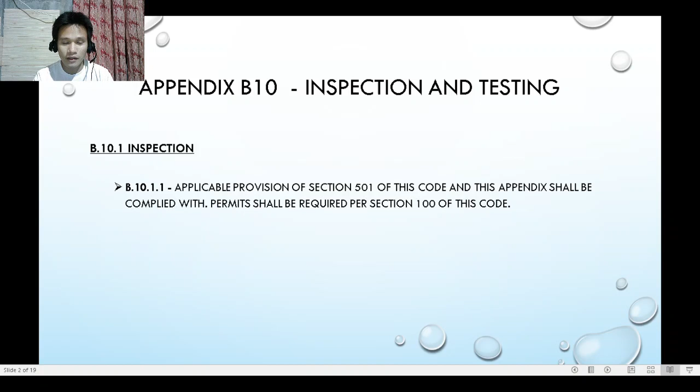So, B10.1, Inspection. Applicable provisions of Section 501 of this code and this appendix shall be complied with. Permits shall be required per Section 100 of this code. So, Section 100 is the permit required. So, to ensure compliance of the provisions of this code, the professional services of a registered and licensed master plumber shall be enlisted in accordance with the Republic Act 1378, the Plumbing Law.

It shall be unlawful for any person, firm, or corporation, whether acting as principal, servant, agent, or employee, to do or cause to be done any plumbing or drainage work for which a permit is required without securing prior permit from the office of the official having jurisdiction under the Department of Public Works and Highways, the Department of Interior and Local Government, or city mayors.

So sa Section 501, Inspection and Testing. So Section 501.1.1, Scope. A new plumbing work and such portions of existing systems as may be affected by new work or any changes shall be inspected by the administrative authority to ensure compliance with all the requirements of this code and to assure that the installation and construction of the plumbing system are in accordance with approved plans and specifications.

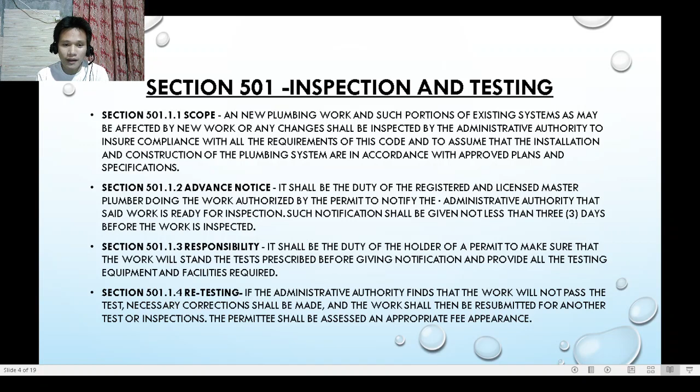The permittee shall be assessed an appropriate fee for reinspection. So sa section 501.1.5, tests shall be conducted in the presence of the administrative authority or of his duly appointed representative. So sa section 501.1.6, corrections, notices of corrections or violations shall be written by the administrative authority and hand-delivered to the permittee at the site of the work or sent by registered mail to the permittee's authorized representative.

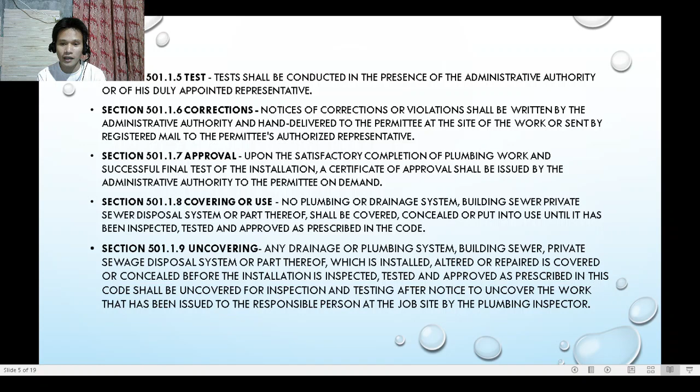Section 501.1.9, uncovering. Any drainage system or plumbing system, building sewer, private sewage disposal system, or part thereof, which is installed, altered, or repaired, and is covered or concealed before the installation is inspected, tested, and approved as prescribed in this code, shall be uncovered for inspection and testing after notice to uncover the work has been issued to the responsible person at the job site by the plumbing inspector.

So, balik ta sa Appendix B. So, B10.1.2, system components shall be properly identified as to manufacturer. Septic tanks or other primary systems shall have the rated capacity permanently marked on the unit.

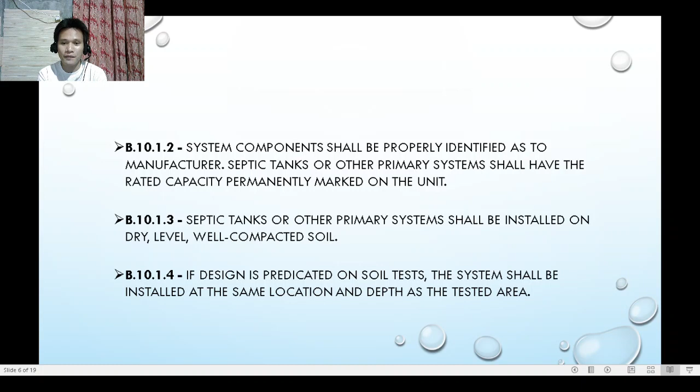So B10.1 testing. So B10.2.1, septic tanks or other primary components shall be filled with water to flow line prior to requesting inspection. All seams or joints shall be left exposed except the bottom, and the tank shall remain watertight. So watertight meaning wala yung magawas tubig.

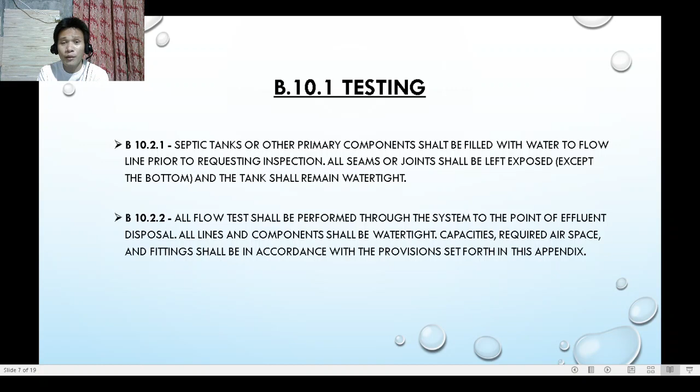B10.2.2, so all flow tests shall be performed through the system to the point of effluent disposal. All lines and components shall be watertight. Capacities, required airspace, and fittings shall be in accordance with the provisions set forth in this appendix.

So Appendix B.11, abandoned sewers and sewage disposal facilities. So B11.1, every abandoned building, house, sewer, or part thereof shall be plugged or capped in an approved manner within 1.5 meter of the property line.

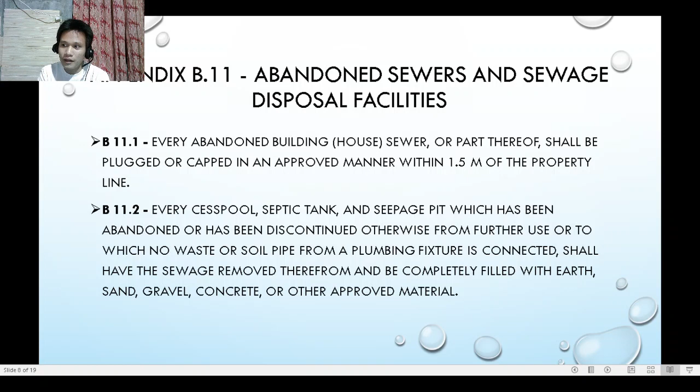So B11.3, the top cover or arch over the cesspool, septic tank, or seepage pit shall be removed before filling, and the filling shall not extend above the top of the vertical portions of the sidewall or above the level of any outlet pipe until inspection has been called and the cesspool, septic tank, or seepage pit has been inspected. After such inspection, the cesspool, septic tank, or seepage pit shall be filled to the level of the top of the ground. So kaning level of the top of the ground is the natural grade line sa imong balay.

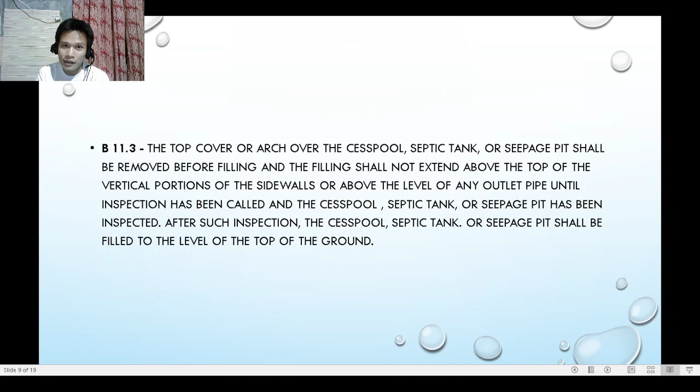So B11.4, no person owning or controlling any cesspool, septic tank, or seepage pit on the premises of such person or in that portion of any public street, alley, or other public property abutting such premises shall fail, refuse, or neglect to comply with the provisions of this section or upon receipt of notice so to comply from the department having jurisdiction. So ang department nga ginapasabot niya is yung administrative authority pa rin.

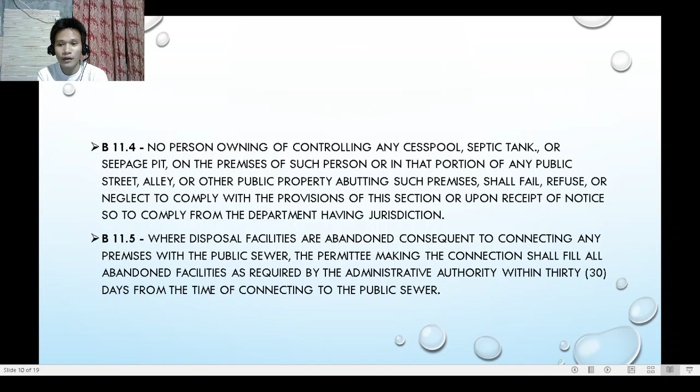So B11.5, where disposal facilities are abandoned consequent to connecting any premises with the public sewer, the permittee making the connection shall fill all abandoned facilities as required by the administrative authority within 30 days from the time of connecting to the public sewer.

So Section 502, testing. So Section 501.2.1, responsibility. The equipment, material, and labor necessary for inspections or tests shall be furnished by the person to whom the permit is issued or by whom inspection is requested.

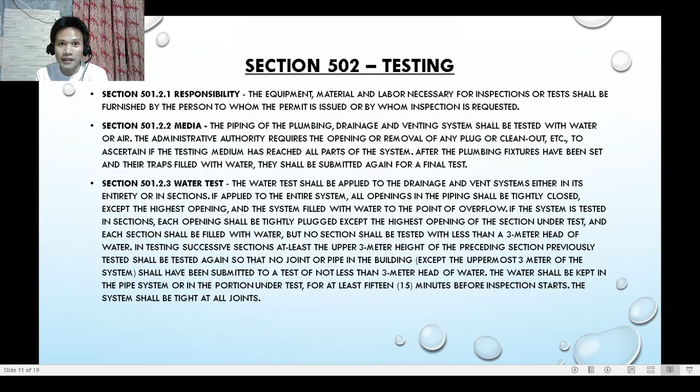In testing successive sections, at least the upper 3 meter height of the preceding section previously tested shall be tested again, so that no joint or pipe in the building, except the uppermost 3 meter of the system, shall have been submitted to a test of not less than 3 meter head of water. So same kanina, 29.43 kilopascals. The water shall be kept in the pipe system or in the portion under test for at least 15 minutes before the inspection starts. The system shall be tight at all joints. So tight meaning water tight, wala yung magawas na tubig.

So water test. Example sa water test sa water supply line. So ibutangan niya gauge pressure ang faucet, tapos i-on yung faucet hangtod sa reading sa gauge. So dapat ang mugawas sa gauge is 5 psi or 29.43 kPa. So pag na pressure drop, meaning na leak.

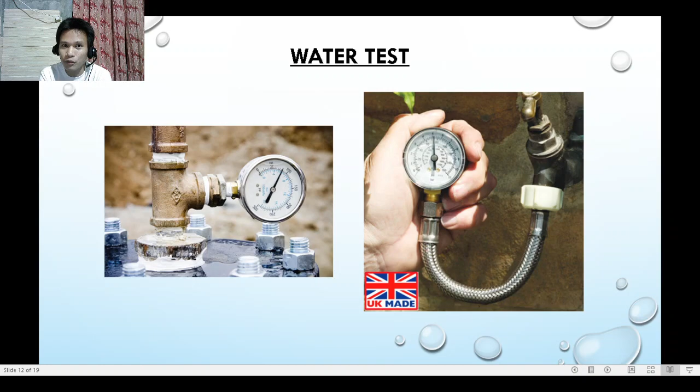So Section 501.2.4, air test. The air test shall be made by attaching an air compressor testing apparatus to any suitable opening, and after closing all the other inlets and outlets to the system, air is forced into the pipe system until there is a uniform gauge pressure of 34.5 kPa, or sufficient to balance a column of mercury 254 mm in height. So the pressure shall be held without introduction of additional air for a period of at least 15 minutes.

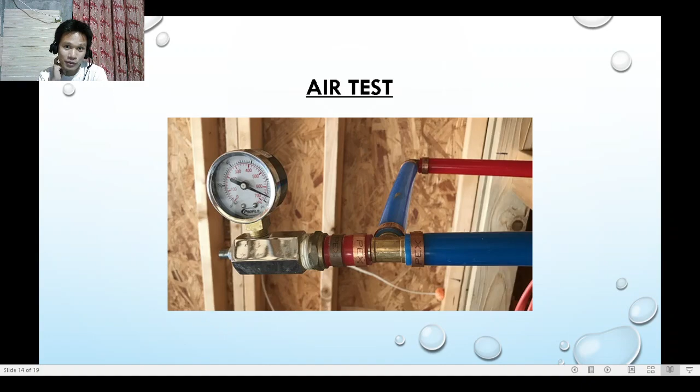So Section 501.2.5, building sewer test. Building sewers shall be tested by plugging the end of the building sewer at its point of connection with the public sewer or private sewage disposal system, and completely filling the building sewer with water from the lowest to the highest point thereof, or by approved equivalent low pressure air test, or by such other tests as may be prescribed by the administrative authority. The building sewer shall be watertight at all points.

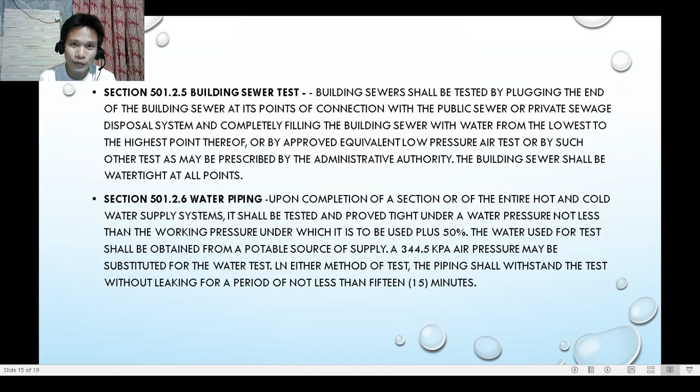So Section 501.2.6, water piping. Upon completion of a section or the entire hot and cold water supply systems, it shall be tested and proved tight under water pressure not less than the working pressure under which it is to be used plus 50%. The water used for test shall be obtained from a potable source of supply, so water supply line. 344.5 kPa air pressure may be substituted for the water test. In either method of test, the piping shall withstand the test without leaking for a period of not less than

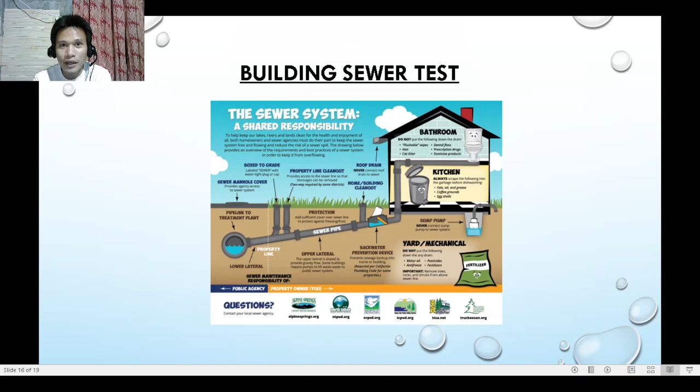501.2.7, defective systems. An air test shall be used in testing the tightness condition of the drainage or plumbing system of any building premises when there is reason to believe that it has become defective. In buildings or premises condemned by the proper administrative authority because of an unsanitary condition of the plumbing system or part thereof, the alterations in such systems shall conform to the requirements of this code.

So Section 501.2.8, moved structures. All parts of the plumbing systems of any building or part thereof that are moved from one foundation to another or from one location to another shall be completely tested as prescribed for new work as described, except that walls or floors need not be removed during the test when other equivalent means of inspection acceptable to the plumbing authority are provided.